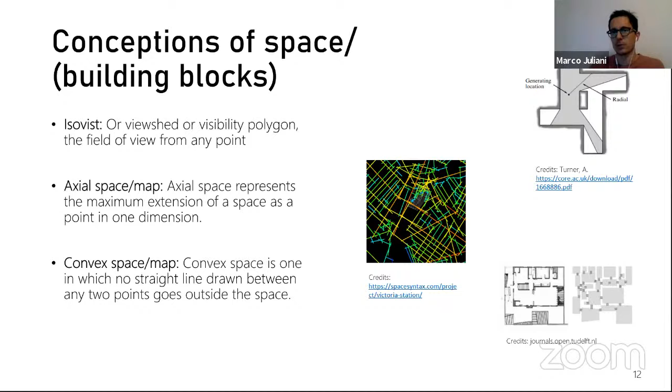So this is one of the final two slides on space syntax. Again, this idea of isovist, which if you're not familiar is a viewshed, PlanBee uses that extensively. It has to do with calculating the viewable polygon from any given point in space. And again, PlanBee utilizes this concept quite a bit.

And the final slide on space syntax is that there are other space syntax software out there: DepthMapX, developed at UCL Bartlett, isovist.org, and even a Grasshopper toolkit called Decoding Spaces that exposes a whole range of analysis metrics on floor plans. Let's see.

So now we can switch over to the PlanBee workflow. In a nutshell, in order to use PlanBee you have to create an analysis grid. In order to do that, you have some flexibility. The bare minimum is to give it a perimeter boundary to describe your floor plate. And of course, a resolution, like you need to tell it, I want my grid to be 1 meter across, 2 meters, 1.5 meters. I think often 1 meter is good because it can be less, but basically you want the basic unit of space that describes the human experience, because anything less than that is just not worth it, and it's more computational cost. So you want it to be fast and representative, right?

So you can add cores, you can add holes in the floor plan, you can add partition walls, and then you've constructed your grid. Then you have your grid. You can analyze various different metrics. And then you have a whole lot of raw data coming out of those metric components. And then with that data, you can do a data analysis and do whatever you want with that. So that's the general schematic of how you use PlanBee.

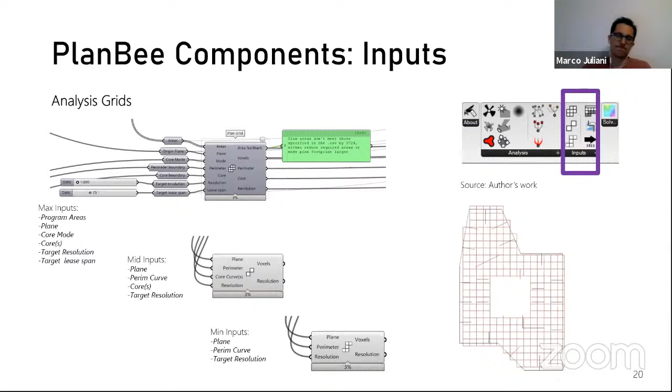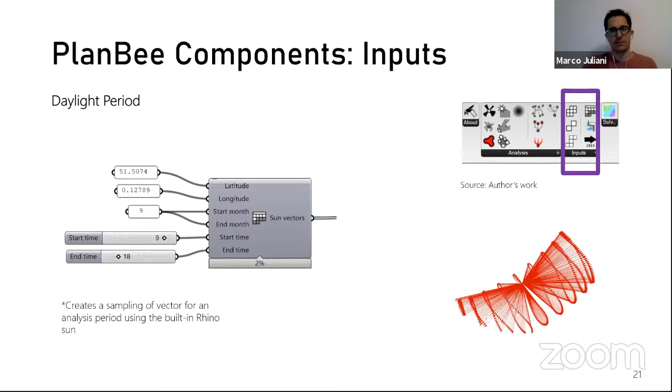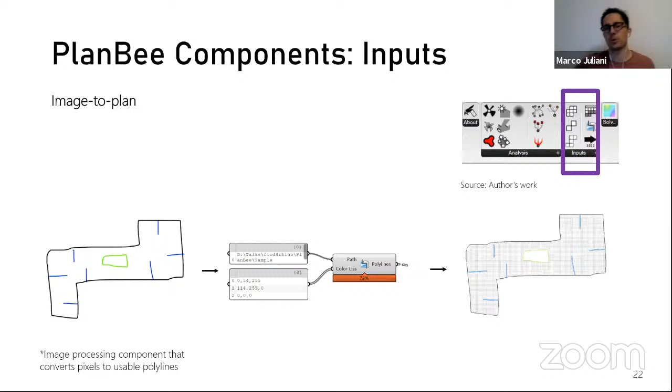After this one, I'm going to stop and show a quick demo. This is the newest component, and I think it's one of the funner ones. This is the one where you can actually draw a sketch and supply the file path, and then you have to supply the colors that PlanBee has to look for. Once you've done that, PlanBee will spit out a tree of polylines for you, each branch corresponding to a color. That's a limiting factor, I would say, because you would want it to just detect that automatically, but maybe for the next iteration.

So let's do a quick demo here. I'm just going to go over what we just went over. I guess you can see my screen. So I'm just going to describe very briefly what's going on.

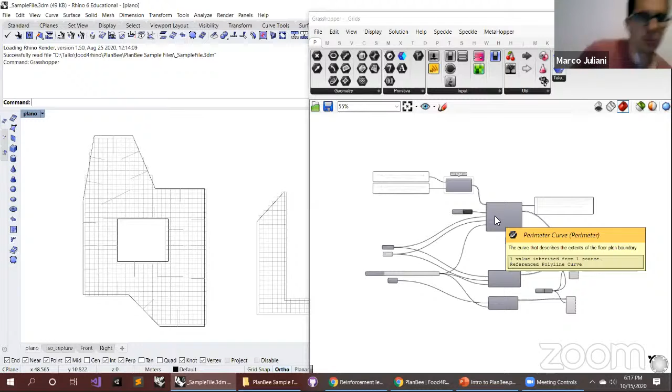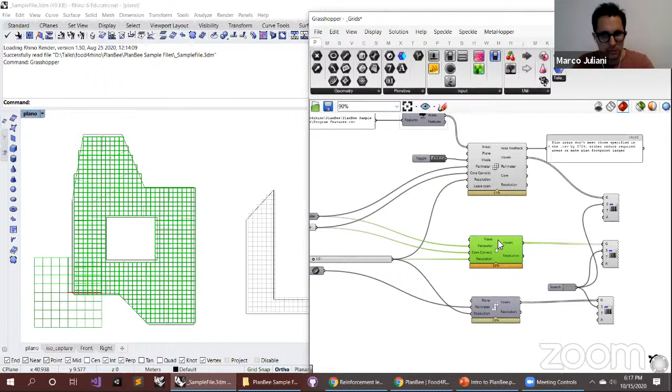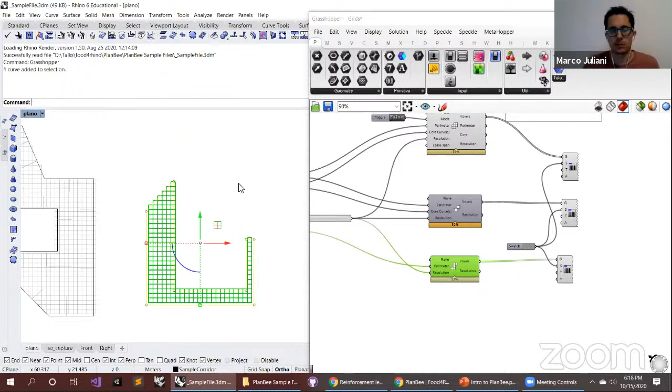So basically, we have an area spreadsheet, and then we have the feature spreadsheet. I've already gone over this, but since I have the file prepared, I'll show you. One way to create a grid, a second way without any feedback or detail, and finally, this one is more designed for corridors because you can't supply a core or any holes. So you could take a residential floor plan of a multifamily building, draw the corridor, and analyze that as a space on its own. That's what you can do with the analysis grid.

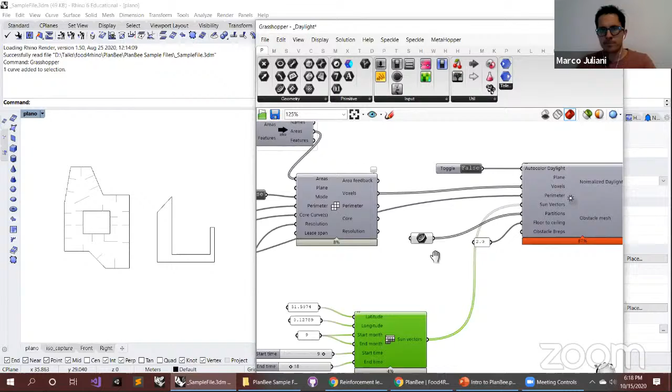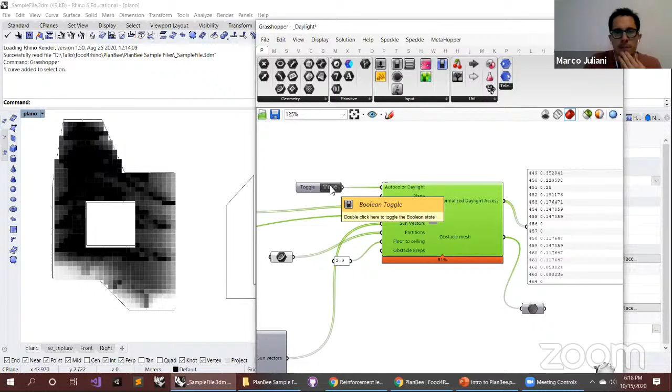Since we looked at the daylight one, let's take a look very quickly. You supply an analysis period, and it spits out some vectors. What's interesting is, if I turn this on, it gives an estimate of what direct sun rays are hitting the cells, so you get a heat map from what's hitting it the most to what's hitting it the least. In this case, I'm giving it a floor to ceiling height, and it's automatically offsetting that and creating an obstacle mesh used for collision detection.

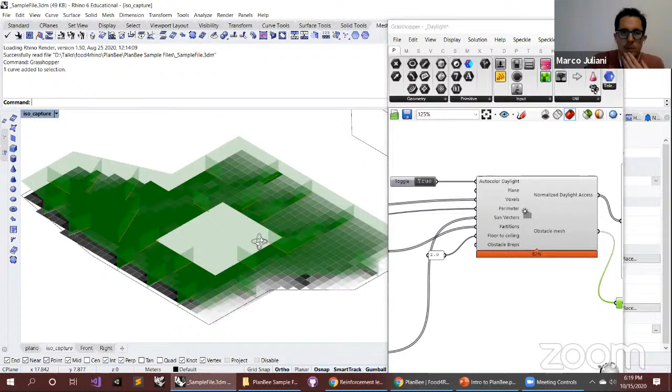Out of the box, without me having to do anything, it's spitting out the collision objects, which is really handy. Additionally, we can add obstacle geometry, so if you have a building in front of it, you can just add that and it will take it into consideration. That's the demo for this one, let's move on.

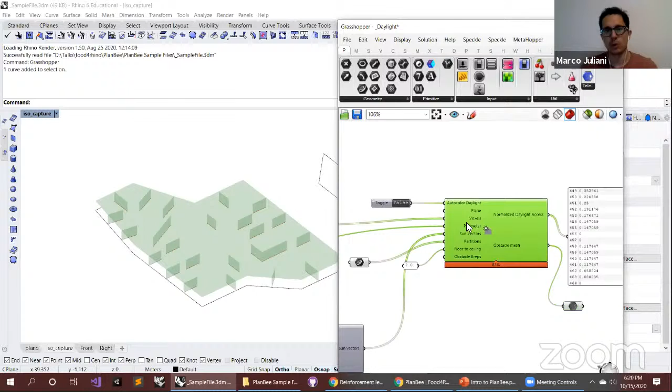The only really important thing to take away from these anatomy slides is that PlanBee has this built-in override for drawing meshes, so that's how you get these colored grids out of the box.

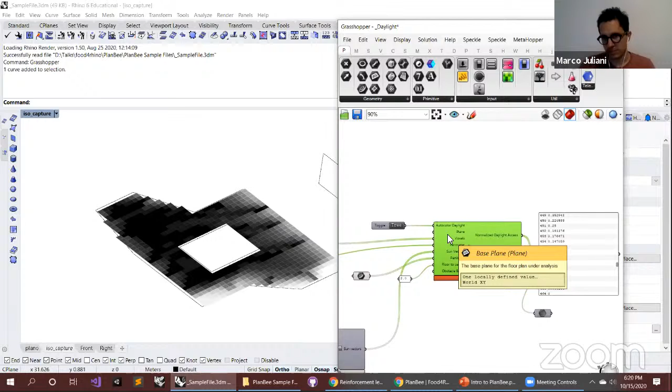The thing to note is that if you have multiple components in one file, it's going to really bog the file down. This needs to be rewritten at some point to use conduits or some other approach. So keep in mind, if you have multiple components on the Grasshopper canvas, make sure to turn it off if you're not using it, because otherwise your Rhino file, your Grasshopper file is going to start to crash. I thought that was definitely worth mentioning, because it could be frustrating if you don't know that and you just leave everything set to true.

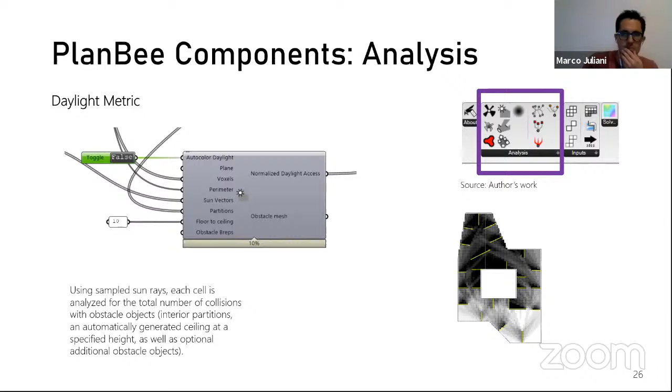So this is the one we just went over, daylight. This other one is the attractor visibility. You can add a series of 2D lines describing attraction or landmarks around your site, and this component computes the visibility to it and creates a heat map for you, and spits out the lines as we discussed.

Each of these components gives you some kind of geometrical output, as well as a range of numbers between 0 and 1 that describe the visibility of each cell. This is the attractor component, and it's one I've come across very often, which is why it was one of the first metrics, since I find myself having to calculate this all the time when we design things, usually in 3D. For PlanBee, we're keeping it to 2D for now.

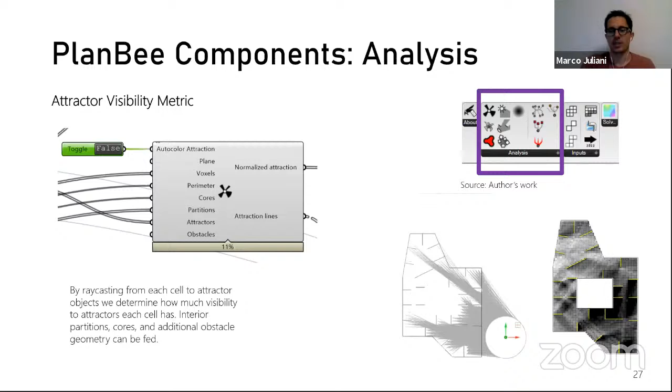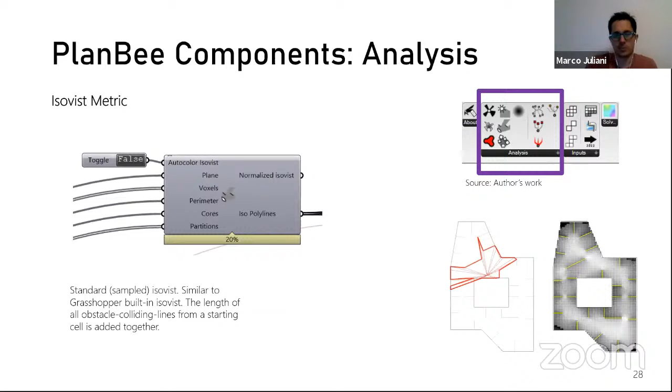There's a very similar metric that's actually very useful in space syntax. It's called neighborhood size, and I believe it's also called connectivity. So it's very similar to the isovist. However, instead of shooting a bunch of lines and calculating the combined distance of all those lines, you actually calculate the polygon that makes up your viewshed or your isovist. So it's just a slightly different way to calculate the isovist that is used to measure the visual connectivity of the space. And this can be quite useful.

In space syntax, visual connectivity is how you can predict how people are going to move in space when you don't consider anything else. If you just consider the space itself, how the walls are arranged, how the corridors are set up, often the theory is that people tend to walk in the direction of their longest line of sight. So if that's your premise, then neighborhood size can be a good metric to have when evaluating these things, because it tells you what the visual connectivity is from each point. In this case, white means it's highly connected, the dark means less connected.

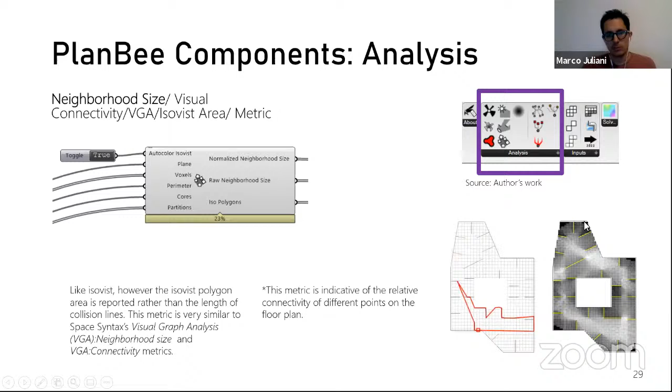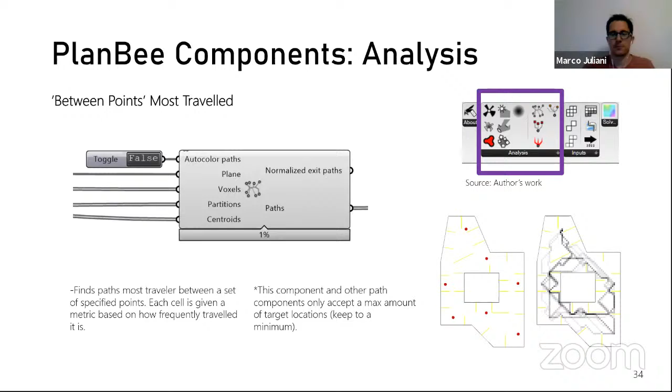This is kind of a made up one. Basically, all I'm doing here is supplying it a number of points on the floor plan, so maybe it can be like the number of rooms that you have, and then it's literally calculating the paths between those points - not just the curves, the polylines that you would take, but also the frequency of how often the cells get used. So that's an interesting one.

So I'm going to show this slide, and then after that, a quick demo. This is the Kohonen self-organizing map, and it's kind of at the moment experimental and not particularly useful. But I think if the hyperparameters, the kind of inputs, get calibrated right, it could in principle produce something interesting.

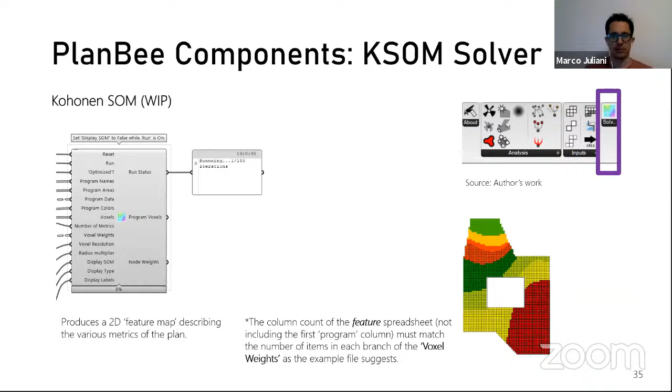So there's a lot of inputs, and in the end you get kind of a zone map like this, where each color corresponds to a different program. You get that output in the form of a tree of cells and weights, and kind of feedback of how your component is running. Some people have emailed me trying to figure out how it's used. I encourage you to play with it.

So here we go. Let's open this file.

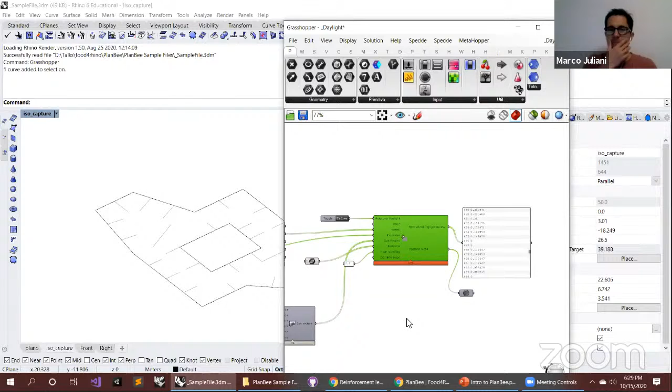I guess I mentioned it before, but if you have multiple components in a file, it can get heavy pretty quickly. Some of these components are doing some pretty heavy lifting, and some have been optimized for task capable parallel computing, but they're still heavy. So let's go back.

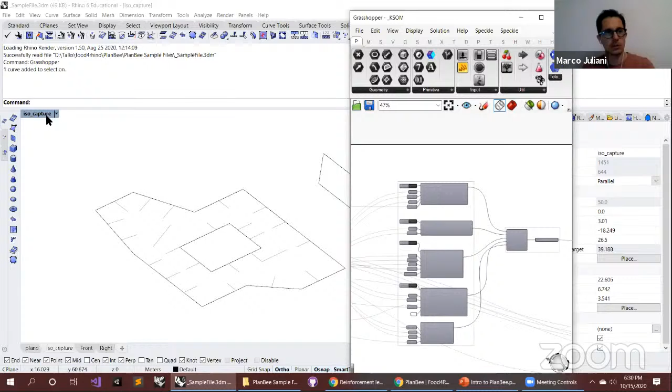The way this one works, this is part of the sample files. All the files I've shown, and many I haven't shown, are on Food4Rhino, so have a look at them.

But this is what we discussed earlier. We're giving it spreadsheets describing the program, the areas, and the features. Then we're creating kind of a grid. We have a very fine grid, and I should probably make it more coarse if we want this to run a little faster.

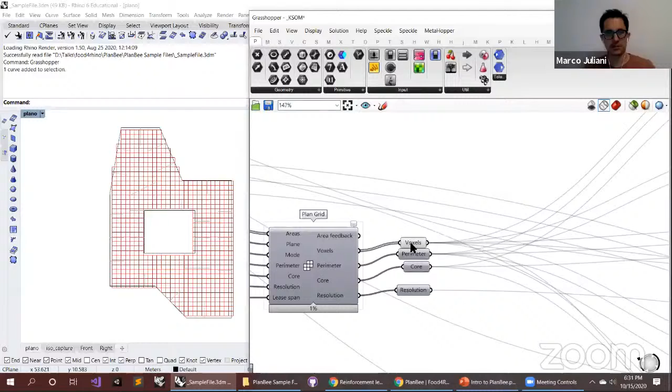Okay, and that took a minute because it's calculating all these analysis metrics. But then you have your voxels, and I forgot to clarify this, Carlos — sorry about that — these are really pixels because right now it's all two-dimensional, but voxels is a 3D term.

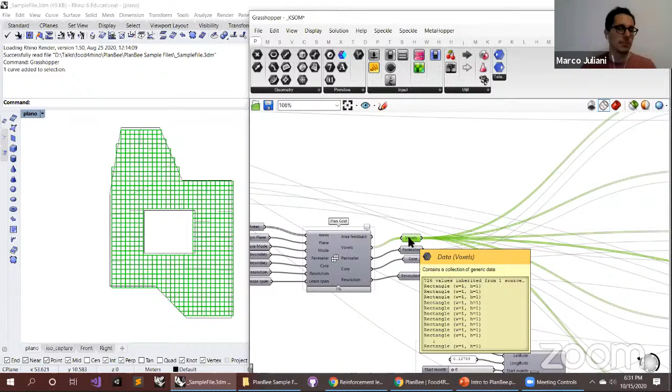So at some point we might do voxels proper. It could well be that we start to create 3D maps of this stuff, but for now PlanBee is all 2D. So when I say voxels, I really mean pixels, and for now I mean rectangles that have connectivity information. Just to clarify.

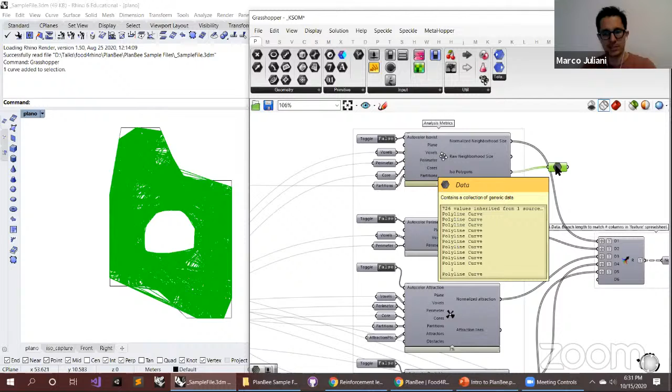So let's take a look. I have my neighborhood size component, which outputs the areas of my isovists. I have this perimeter component, which is very basic — all it does is compute distance to the perimeter. And then I have my attractor one, my daylight one, and my COVID one.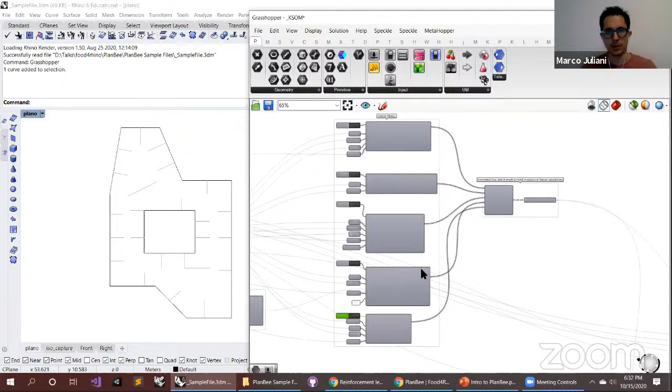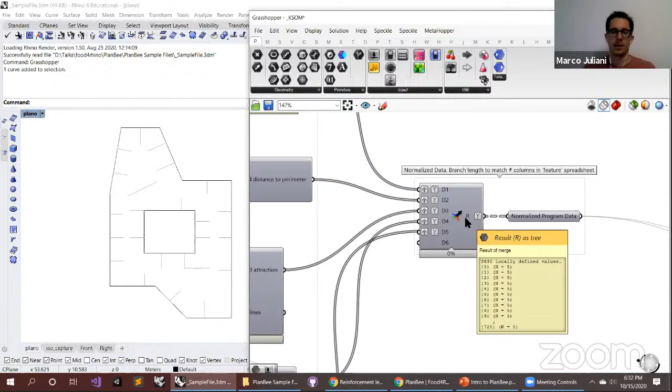So I have 5 different metrics, and I'm getting their normalized values — normalized, normalized, normalized. In the end I end up with a tree where each branch represents a cell, and each item represents one of the metrics. So I have 5 metrics per cell, and in this case, 725 cells.

And when I have all that data, I can finally start to make use of this component. In this case, reset and run — optimize is kind of a test feature, so it doesn't do much right now. You can give it your program names.

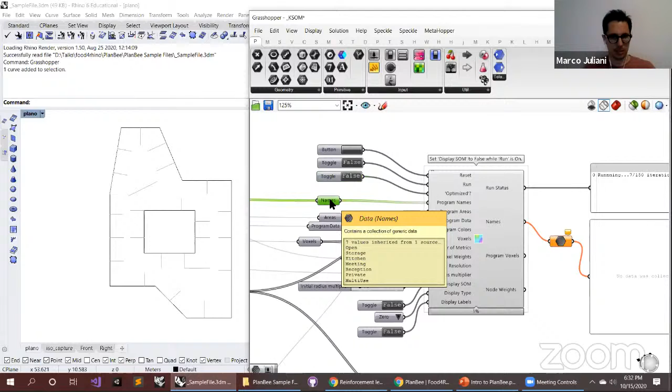In this case, seven programs. Each of these programs has a program area, and I'm getting these from this component back here, names and areas, and program data. Program data is the feature information we described — for that, please refer to the features, program features CSV. So I have my program data, which describes the desired features of my program.

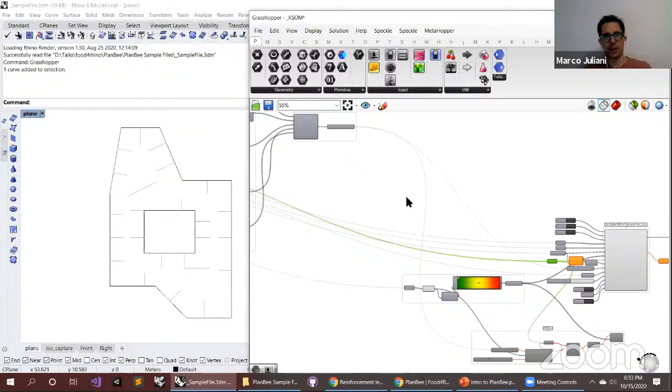And then I have my voxels. Number of metrics in this case is 5, because again we're supplying 5 different metrics. And then this is the good stuff — this is actually the program data, all the normalized information that comes out of all this analysis.

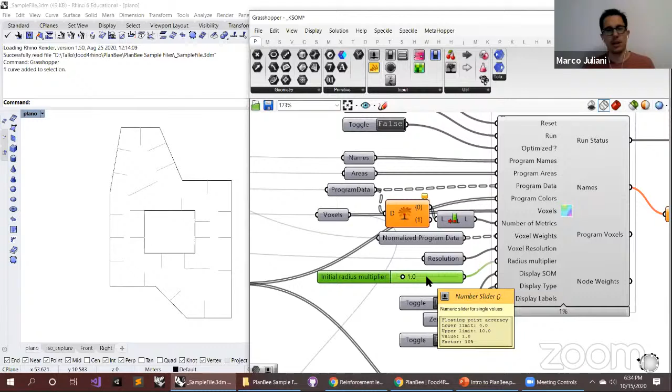And then the resolution, and there's a hyperparameter called radius multiplier — if you get into the Kohonen self-organizing map algorithm, basically it operates with a radius. A field gets initialized, and there's a system where the different nodes in the field get initialized and then recalibrated to find their place where the features are most present. There's a radius that you can manipulate or not, and in this case this parameter is exposed so you can play with it. And then finally, this is an important toggle.

This is the display SOM. And display type, you can actually display different aspects of this thing, depending on what you're feeding: 0, 1, or 2. So 0 is like the discretized SOM, where you get like program colors. The second one is kind of, you get the best matching unit multiplier. And the next one is kind of the weight, the node weights, the raw weights.

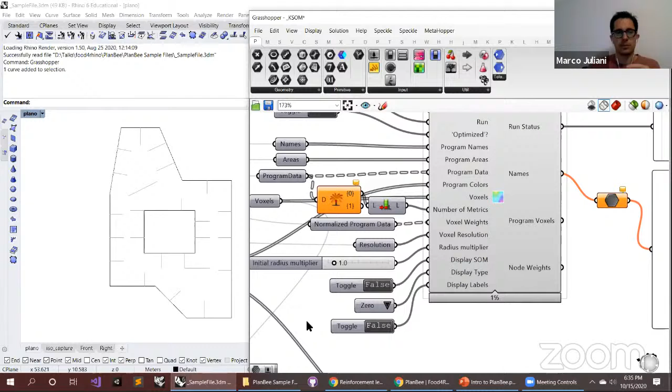So again, the only useful one for now, let's say, is the program one. And then you get some display labels. So if you turn this on, you'll get like the labels describing the program. Yeah, so when we run this thing, you'll see that I can hit my kind of restart button, set this to true. And then for now, I've limited it to 150 iterations, so it doesn't run forever. So if you forget to hit false on run, it will stop on its own.

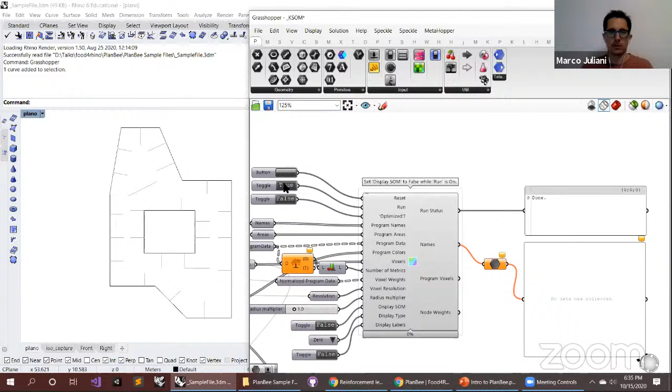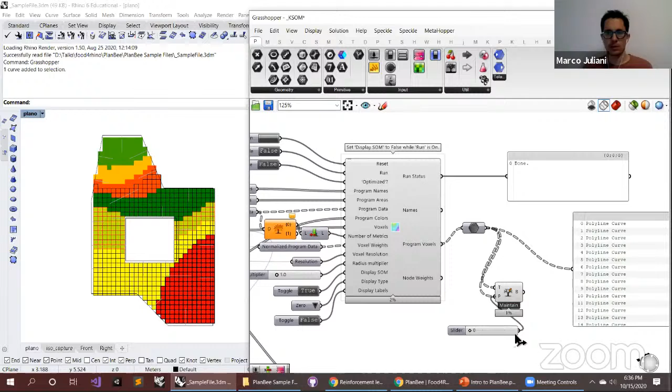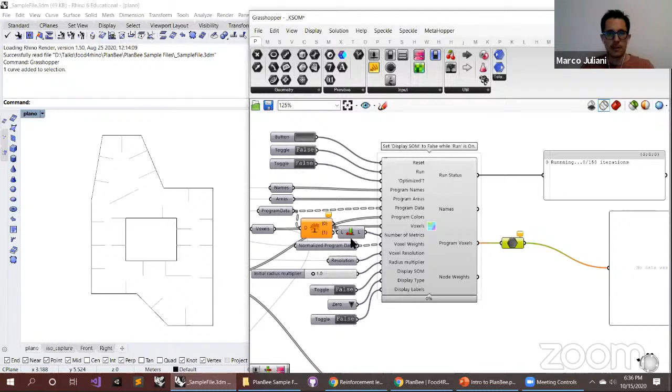And so let's say for now it's done running. And what I'm able to do is turn on the display SOM. And in this case, I can see my program voxels. So if I start saying I want this tree branch, oops. So again, each branch corresponds to a program. And so in theory, if this is calibrated properly in an oversimplified world, this could be useful potentially. So yeah, for now, it just produces kind of a rainbow diagram. But it's a work in progress. So we'll see.

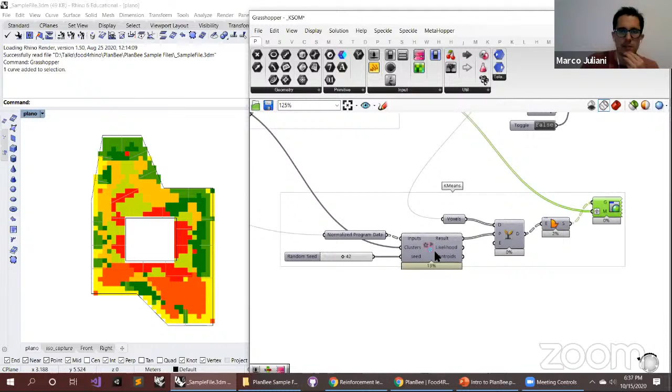And then in tandem to that self-organizing map component, I wanted to show Proving Ground's k-means clustering. They also have a whole range of components that you can start to use to cluster data and visualize it. And so in this case, you can use k-means clustering to do something very similar, to basically group all the cells into clusters according to how similar their weights are, like the raw data, right? We keep talking about this raw data that represents each cell. So we can plug it in directly to Proving Ground's k-means clustering, and then we get these various clusters that tell you, okay, the red is program that is similar to itself, and the same for every other color.

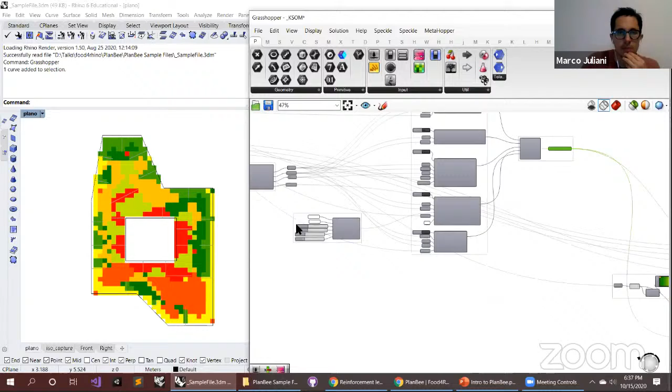So again, this can also be useful. Right now it doesn't look like anything, but maybe it's the resolution. Let's bump it up a little bit. So in principle, what you do with the raw data hasn't been figured out. But the idea is, let's start figuring that out, because I think there's a lot of data inherent in floor plans, even when you don't take into account many of the operational things. When you just take into account the configuration, there's a lot of raw data there that you can start to make use of.

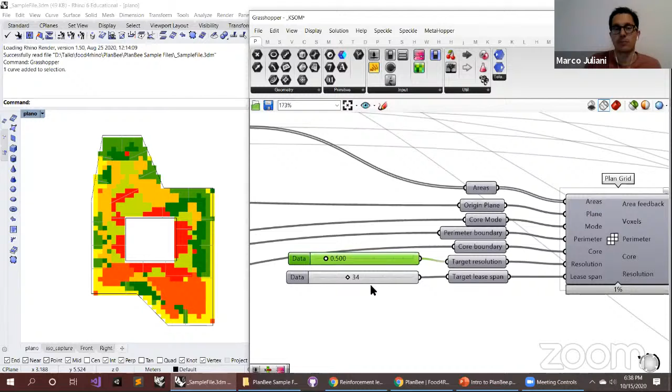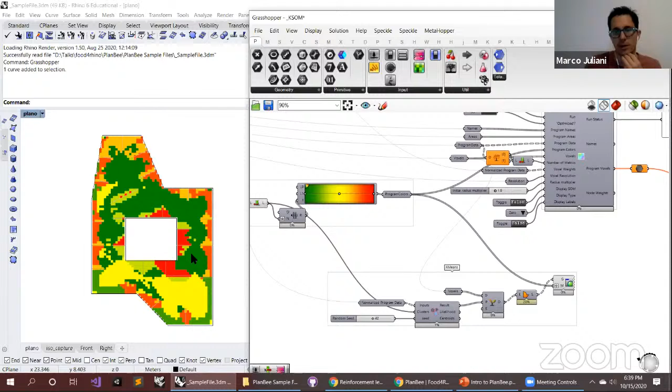Okay, so now it starts to look more like the zones make more sense, right? You can see that these circulation areas are largely in the same category. East and west are in a similar category, and then this southern exposed part is in the same category. So what is that doing for us? I'm not sure, but it certainly is starting to cluster floor plan zones that are similar with one another.

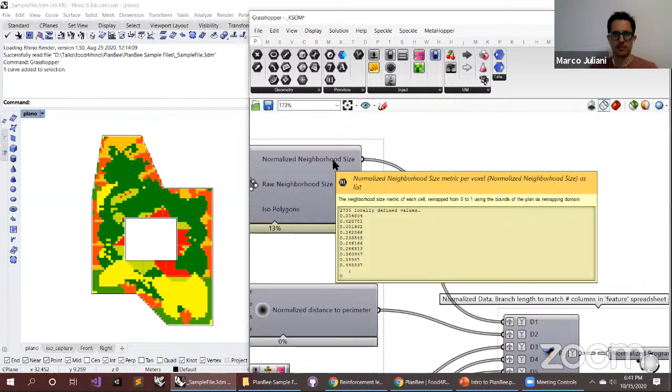Yeah, Roberto asks if there is a way to change the color ranges in the analysis directly with the plugin tools. Yeah, sorry, that's a no for now. I mean, you can do whatever you want with the raw values because they come out of the components normalized. So for example, you can take these guys and really quickly plug in a gradient component and create your own gradient. So that's the thought there with these normalized values. You don't have to parameterize. You can just plug it straight in and it works.

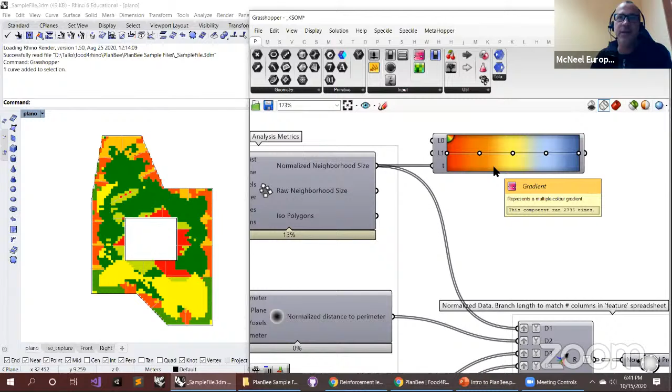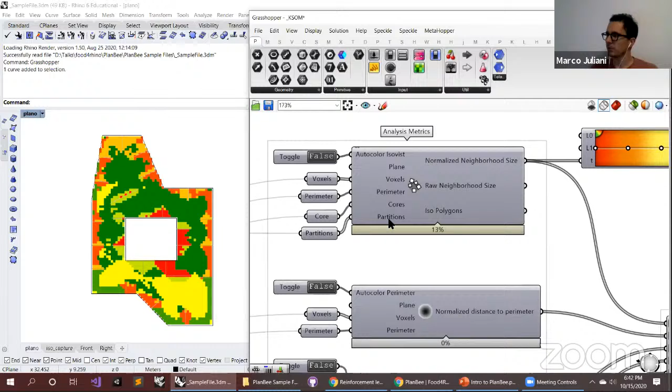Yeah. Actually, Mike Soderberg suggests to output the scores from 1 to 0 for each analysis, so you could use something like Human to make a custom color scheme for a grid. That's right. Okay, I'm not sure that I get that part. I mean, the values are between 1 and 0. It's just hard coded from black to white. So I guess you can add a gradient input. I'll take a look at that.

You would still have to throw down a gradient at some point, I guess, right? So an alternative would be to have it built in, and you can just right click and select from a range of like 5 options, and that way it's just pre-built. So yeah, I think that's a good suggestion.

Perfect. Some more people are thanking you for the presentation. They say it was excellent. And another one says that the COVID idea is so practical. We'll try it later. Awesome.

Yeah, and there are probably better ways to measure these things. But if anyone has any ideas, what else can we be measuring with COVID? Obviously, a lot of it is maybe not in the domain of architects, but please send through some ideas.

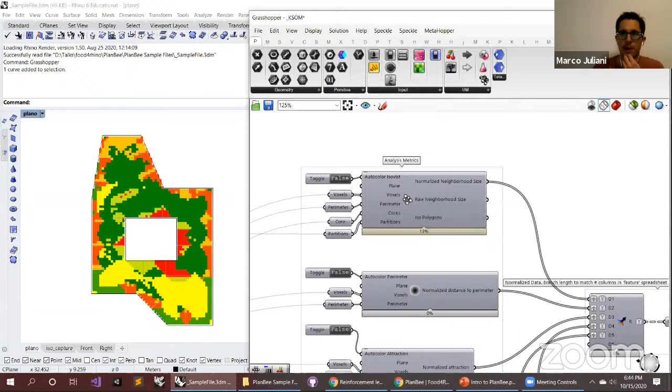And the example files or tutorial files are on your GitHub or on food4Rhino as well? On food4Rhino. So let me go there. So there is the installer, and then there is a zip file with example files. Great. Correct. And I've included the image because actually I didn't go over that. There's an image there, and there's also a sample file that shows how you can upload a sketch. Here it is.

So this is the component. Basically, you can feed it an image that you have on your C drive or anywhere. It takes a minute. Nice, cool. And so you can get the polylines, and then you can literally plug that into PlanBee for analysis, right?

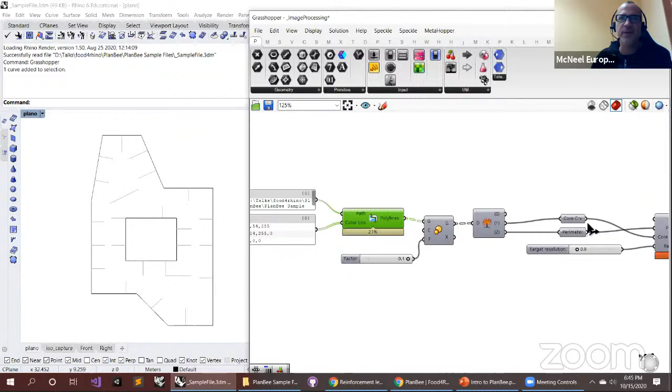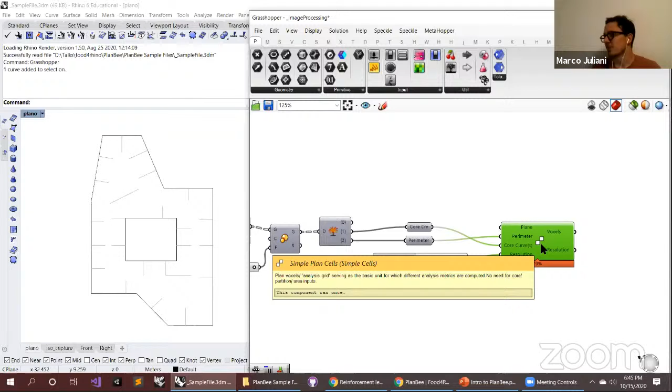Do you plan to make it open source? Well, it is open source already. So if you want to get involved in any way, let me know and contribute to it. So feel free to contact Marco for any kind of support, but also if you are interested in being a contributor.

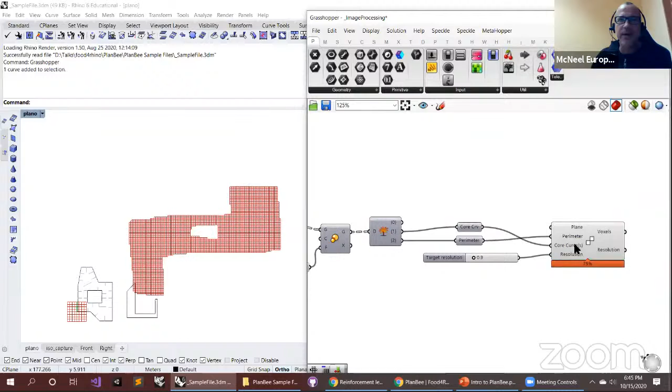More questions, this time from Mandar Campbell. Is there a way to connect the algorithm to a web page? No, not right now. You can open this in Rhino.Inside Revit and have it inside of Revit if you want it somewhere else. So you have tried it already? I haven't tried it, but all the Grasshopper plugins run inside of Revit, right? Exactly. For the web, I would have to port it to be accessible on a website. For now, it's either using Compute or maybe through ShapeDiver. But yes, something to consider.

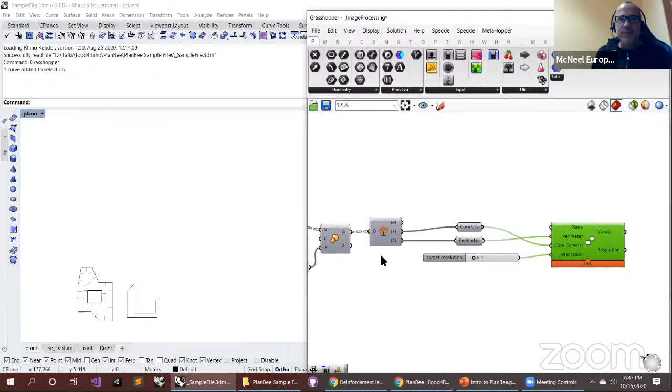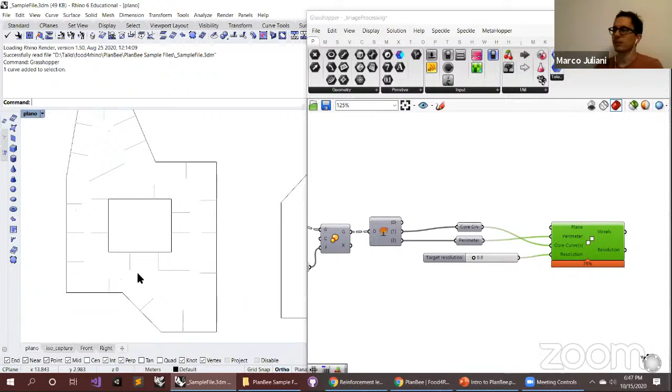What else? Hi, Marco. Have you ever thought of implementing polygonal subdivision algorithms for the base structure rather than using a 2D grid of voxels? Polygonal, so like a Voronoi? Polygonal subdivision algorithms. I don't know if it's a subd object or a mesh. Could it be like an octree type thing, something different from a grid, basically? I guess. Yes, something that is different from a 2D grid.

Yeah. I haven't thought about it. I think I use the grid as a starting point, just to kind of get the ball rolling. But if you have any specific suggestions of what you would like to see, I'd be interested in hearing that. And what would be the benefits? I guess you can describe a zone that doesn't have as much detail more efficiently if you have fewer voxels in that zone, right? So yeah, something to think about.

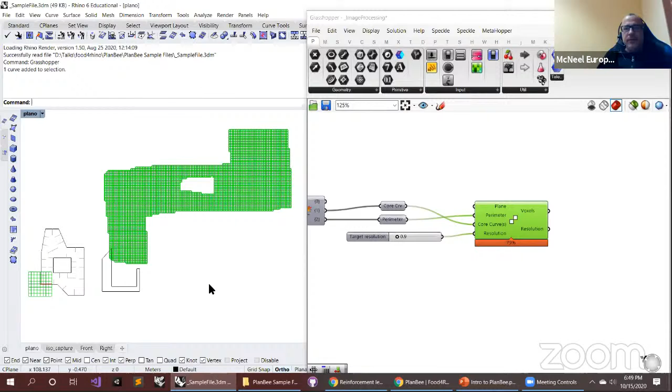And second thing from a person that already asked something before: I understand why in the context of this plugin you are using path search based on the grid you generated. But have you ever tried to implement a vectorial shortest path search algorithm? That's a good question. I recently was made aware of this kind of algorithm where you don't use a graph, but you use a heuristic algorithm like what you described. You shoot rays. If you have collisions, you find a way around it, and so on. And it seems to be a very efficient one. I haven't tried to implement it, but maybe that would run quite fast.

And I guess if you think about it, that's also kind of how people move, right? We don't move in a predetermined way. We don't understand the shortest path from the get-go. We have to figure out the shortest path by walking. So yeah, I think that would be a good alternative to the current shortest path. Okay. Maybe for next versions of PlanBee.

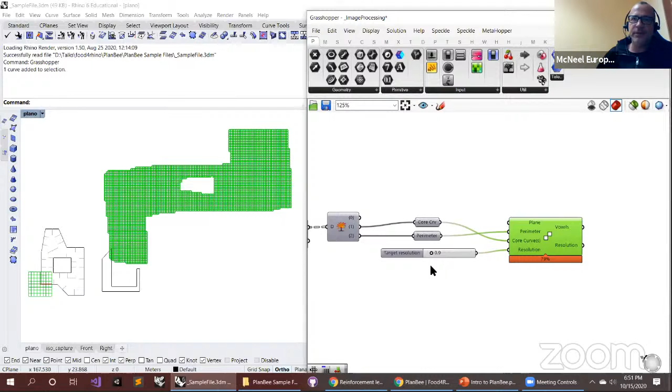Is there a detailed tutorial to distribute a program based on weights, as you showed in the last slides, to understand better how to apply it? Yes. Honestly, it's a bit of extrapolating you're going to have to do. In the description here, when I first released the plugin, I added a very detailed description. And here there's a link to what a self-organizing map is, if you want to understand that concept.

Actually that's just Wikipedia. There's another link right here that was shared with me when I was at the Bartlett, and it's a really good description of what a self-organizing map does. Whether the self-organizing map is a good algorithm to apply to what we're doing here is a different question, because I think it needs more testing. But I would encourage you to go to the PlanBee description, click on this AI Junkie hyperlink, and get familiar with what this is doing.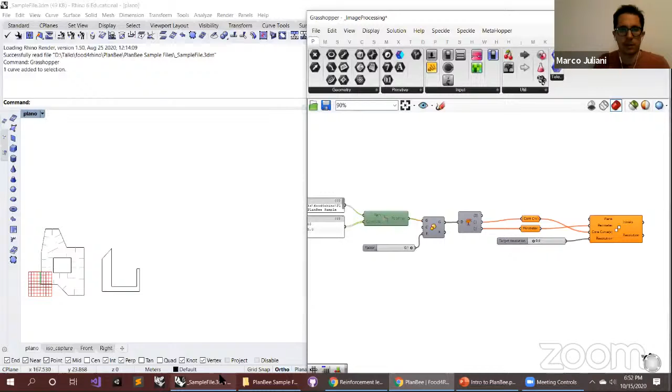And then once you've understood that, you can come back to these sample files, and it'll become a little bit more clear why the data is structured as it is. So, you're creating a kind of a multi-dimensional vector. So each cell contains 5 data points, right? Each cell is aggregating these 5 different metrics. And by doing that, it's a field of objects, similar to the field that's described in the link that I just showed right here.

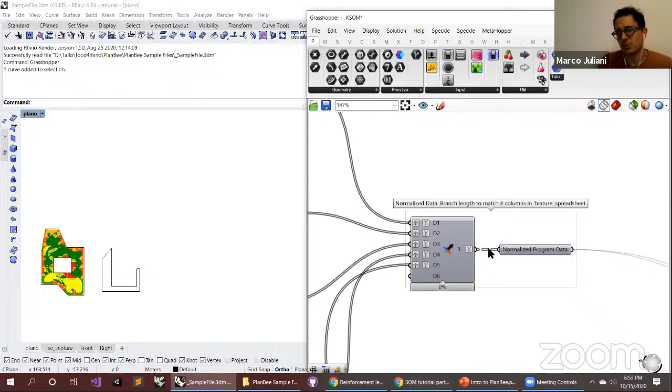So this is describing how these things are connected, how an initial starting point is determined, and how the algorithm then refines its neighbors until it finds a feature map that is descriptive of that field. And so that's what this is doing. And this file, again, you can find it on food4Rhino. And if you follow that tutorial and come back and look at this carefully, you can start to understand what's going on.

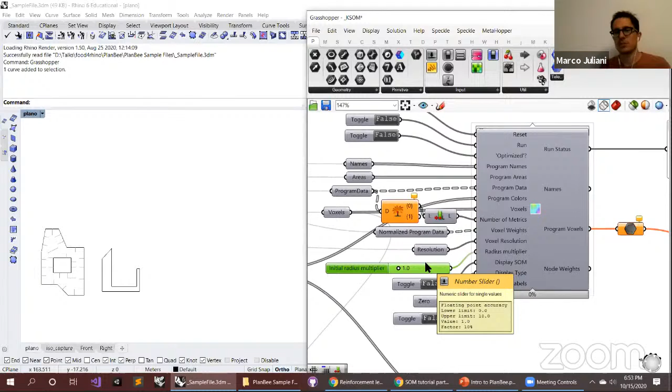And again, you can play with this initial radius. That's kind of the only thing you can do at the moment. It could well be that I can expose more parameters. I just wanted to keep it simple. There's already a lot of inputs. So yeah, hopefully that helps.

Well, Kate adds that she's working on a big workplace project right now, and she would like to collaborate, because until now she has only been using Galapagos. I hope Kate is a female name, because I'm saying he or she depending on what I think, but if not, please don't take it wrong. Okay.

So the person that made the previous comment, I don't know the name because it's only strange symbols here, says triangulation plus quading the triangles. Usage case: visualization matches the geometry 1-to-1, plus having more resolution in areas that have more detail in them. This is related to the grid, to the question before, with the vectorial shortest path algorithm.

Right. Well, I think it's better that he contacts you directly with some more details. Sure. So you can have a private conversation about this. Sounds good. Different algorithms and ways to make the analysis, that sounds great. Well, Eleazar, she's from Venezuela.